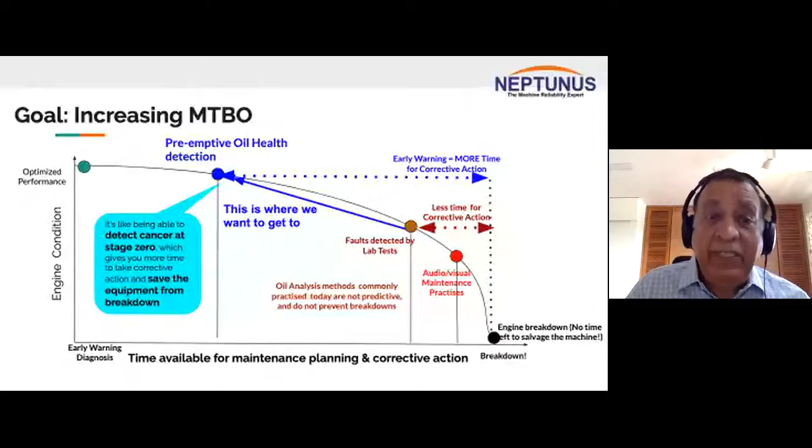Somebody talked of diesel doctor, somebody talked of lube oil analysis, etc., which took your detection point further up the curve, what you can see on the brown one. What I am propagating to you today is to move it so far ahead on the curve that you have enough time to take small corrective steps, small continual improvement steps to keep your engine performing in the best bandwidth. So I call that detecting cancer at stage 0, which gives you enough time to take corrective action and eventually eliminate breakdown completely.

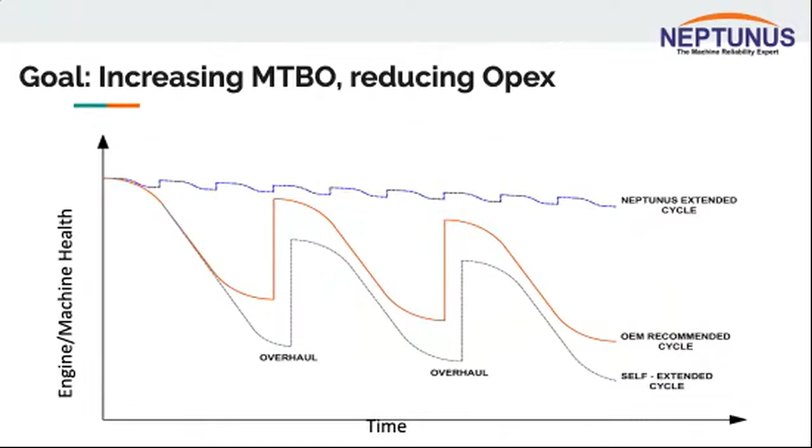So look at this slide. If you see the typical cycle of overhauls, you will see that the red line is what your OEM recommends. So after a certain number of hours, he could ask you to do a top overhaul, another few hours a major overhaul. Performance goes up to close to what it was at the test bench, comes down again, and so on and so forth. The dotted line below that is the line that an operator would typically do. So try and extend overhauls even at the cost of performance. And the blue line on top is what we propose is the right method of maintaining equipment today.

So small steps. So if one fuel injector is bad, replace it on time before it creates more problems in that cylinder. If there is one cylinder which has poor compression, please take care of that before that becomes a bigger issue. Eventually, I want to see this industry moving away from top overhauls and major overhauls to a system where we are going to say that we'll do whatever maintenance is required at frequent intervals to keep this within a band range.

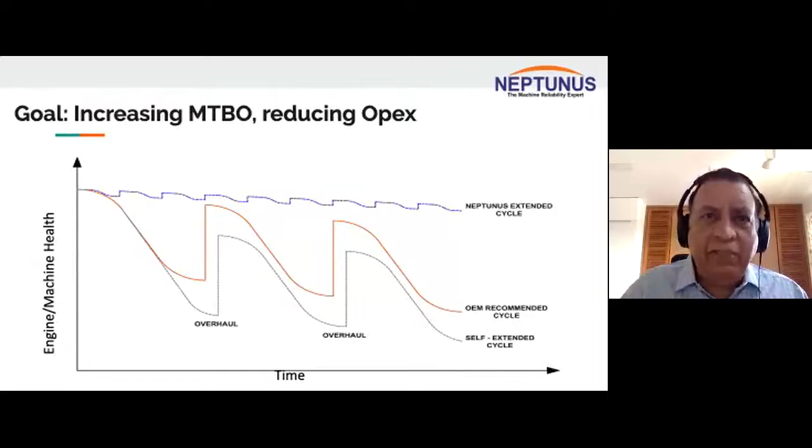There is a lot of research work going on here. The numbers that researchers have put out for such an approach to maintenance is staggering. They're talking of 70 and 80% reduction in OPEX costs by doing maintenance in this manner. So more of it later, but it's something that I'd want you to think about.

Let's come to spare part management. Spare part, most expensive element of OPEX other than fuel. So I'll place before you a few pointers. Please see what you'd like to take away from this one. It would vary from ship to ship or from company to company. But essentially, what we observe over the last 20 or 25 years, that common sense has been replaced by a repair by replacement philosophy.

So at one time, overhauls meant you had micrometers, you had verniers, you had internal micrometers. Gauging was such an important part. And after all, a top overhaul is nothing but a decarb, what we call. That means removing carbon from the cylinder. Do you really need to replace cylinder heads?

Do you need to replace all valves? Do you replace all guides? Do you need to even change turbochargers? Is it not possible to overhaul it? So I rarely see these days people gauging cylinder liners in four-stroke engines, especially the high-speed engines. I rarely see people gauging valves or valve guides, etc. A lot of money, I believe, is being wasted.

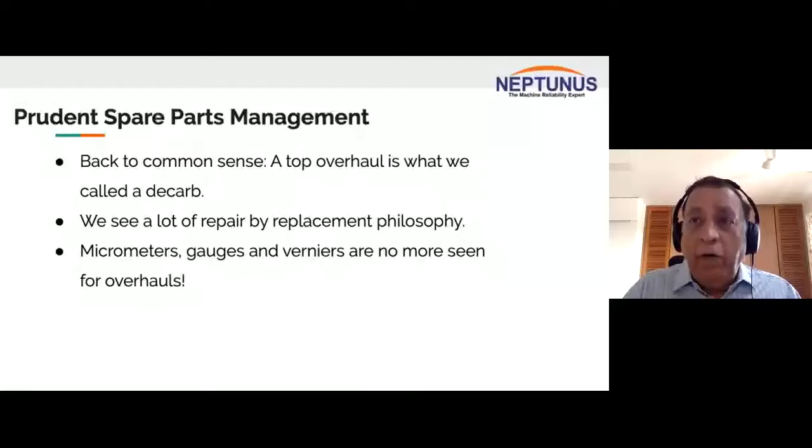So maybe you want to look at going back to what we did 20 years ago. That means that you calibrate, gauge, and only change those parts which have gone outside their wear limits. Incidentally, Caterpillar, Cummins, MTU, all the high-speed guys, even now if you ask for it, they have a manual that will give you change or wear limits, and they will tell you which are the use-again limits. So try and use that as one step.

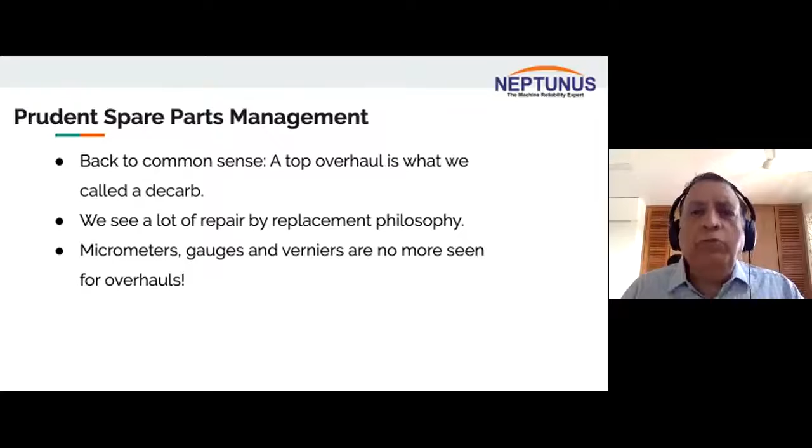Reman parts, I think all those who use CAT or Cummins or MTU engines, high-speed engines especially, reman parts or remanufactured parts is a great way to save money. Are they genuine? Yes, they are genuine. Are they rebuilt at the factory or by a distributor? The answer is at the factory. They carry the same warranty as brand new parts.

Big savings. For example, on your CAT 3500 series, an injector is roughly $1,800 to $2,000. A reman part will cost you roughly $1,200, a clean saving of $800 per injector. If you have 16 injectors, we're talking of saving $12,000. It's a lot of money. So cylinder heads, turbochargers, lifters, all sorts of components can or could be looked at under the reman program. Please see if you're using them. That's something that can be saved very easily.

Plan in advance. Get discounts from your vendors. Most manufacturers, if you place orders for your overhaul 6 months in advance, would give you decent discounts. Niigata, for example, would give you anywhere between 2 and 7, 8% for bulk orders that are placed 6 months in advance. I think all it needs is a little bit of planning, and 7 or 8% discounts are not small. So please speak to your vendor, see if there's a solution that you can find.

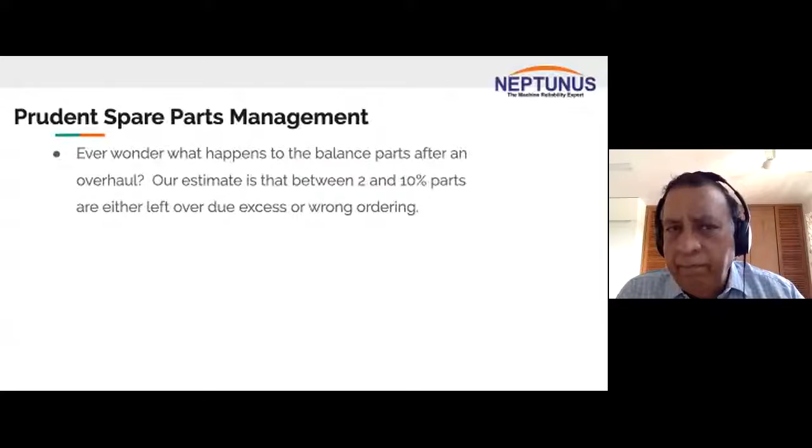Now, have you ever wondered what happens to the balance parts?

It's impossible that somebody has ordered just the exact amount of parts that go into an overhaul. The bigger the overhaul, the larger is what I call the spillover. It is our estimate that anywhere between 2 and 10% of the parts are either left over due to excess or wrong ordering. So if the parts are wrongly ordered, what happens?

They get lost into your system. They get stored on the vessel. Nobody ever hears of it. The office doesn't bother to find out what has happened to these excess parts. The next chief engineer who comes in is unsure. They may not be stored properly. They could be rusted. A lot of money, I believe, goes wasted here.

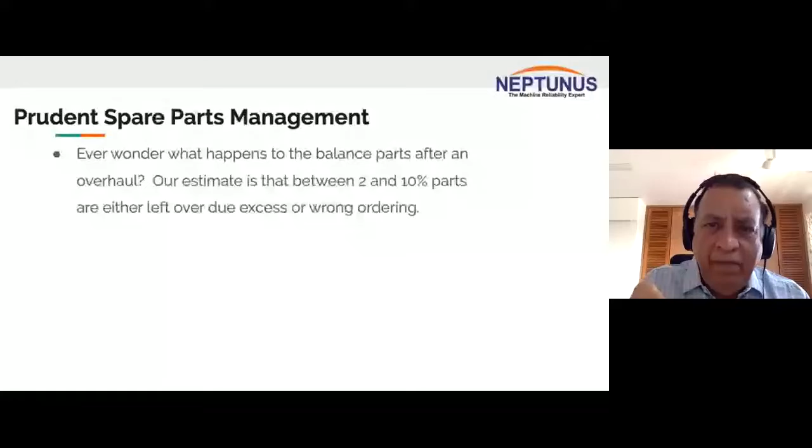Please focus your attention on whether you are taking care of those parts that are balanced after an overhaul.

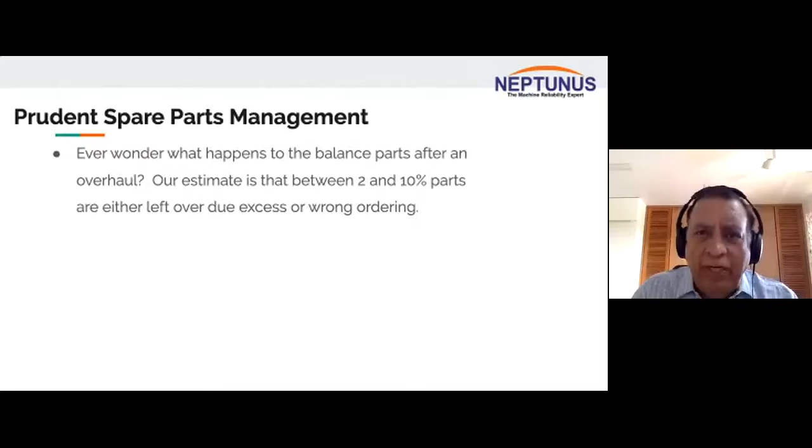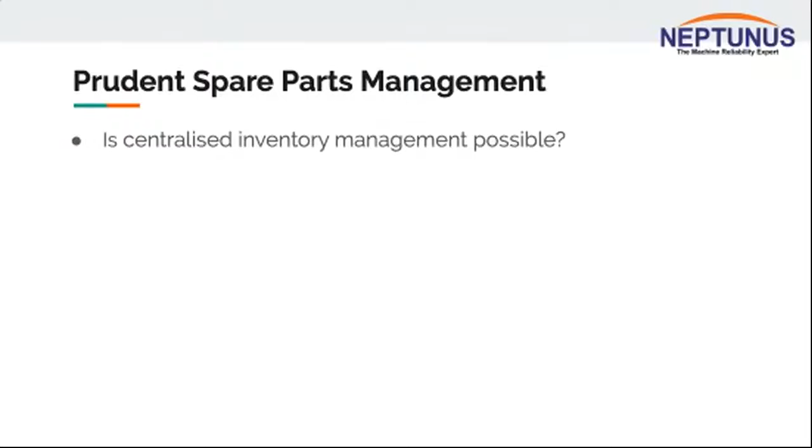And finally, is centralized inventory management possible? It is possible that you may not have a central store, but in today's technology-driven world, it is completely possible to account for the last O-ring or gasket within your fleet, especially if you know that you have a number of engines of the same type.

Eventually, these 2 and 10% that are actually located in various parts of your fleet should be tracked and should be available for an overhaul on another vessel. So, centralized inventory management makes it possible for money to be saved.

So I believe makers take back leftover spares at a lesser price. Sunil Kumar says. Sunil, I don't know whether they take it at a lesser price, but if you could negotiate with them earlier, or much before the contract starts, I believe there is a chance that you could get them back at the same price.

Ravindra Pandey asks, is Cat engine spare parts available reman? At the moment, we don't have a reman policy, but in any case, our being a medium speed engine, the spare part consumption is very small.

Bhagyashree Ogle says, could you please clarify what is MTBO? Sorry, Bhagyashree, MTBO is mean time between overhauls. So the period of time, either in running hours or in case of cars it could be mileage, is the time between two overhauls. And the whole idea is that you want to extend the time between overhauls.

Is there any drawback in using reman parts? Hitesh, none at all. There are no drawbacks. Reman parts carry the same warranty as original parts.

What is the life of reman parts compared to new parts? Mr. Bhutapuri asked me. It's the same. It's absolutely the same. There is no change because it's only the casing that is being reused. All other internal parts are brand new. So please do not believe that reman parts would have a lesser life. And this goes across brands. I'm not only talking of Cat or Cummins, but across brands.

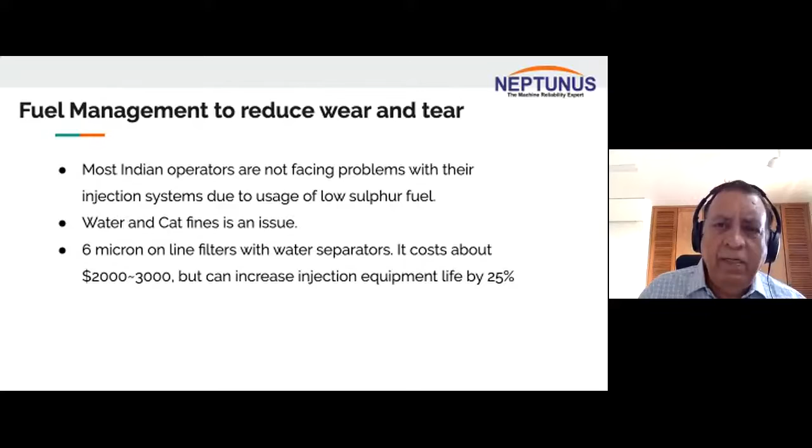Good fuel injection equipment means a good, clean combustion chamber, and that automatically prolongs the life of your equipment.

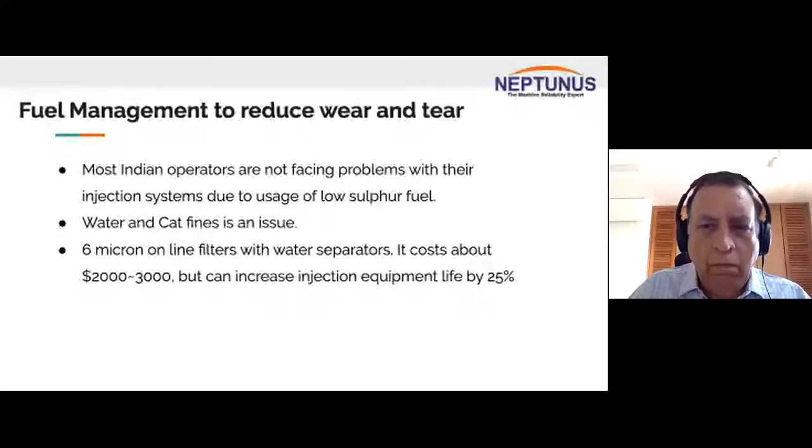Lube oil is something I'm passionate about. We had a seminar recently, and I keep spreading this message, not only in shipping but also in industry: the lowest hanging fruit to saving big money on your engine is to focus on your lubrication oil. Few people take it very seriously.

If you look at the diesel engine itself, oil degradation is caused by products of combustion such as acid, soot, unburnt carbon, moisture, etc., getting into the crankcase. You have a reduction in viscosity due to fuel dilution, coolant dilution, sometimes chemical contamination. Oil is under attack due to carbon deposits and the millions of wear and tear abrasion particles that keep coming into the sump. These cause oxidation, the nemesis of oil, leading to varnish, lacquer deposition, etc.

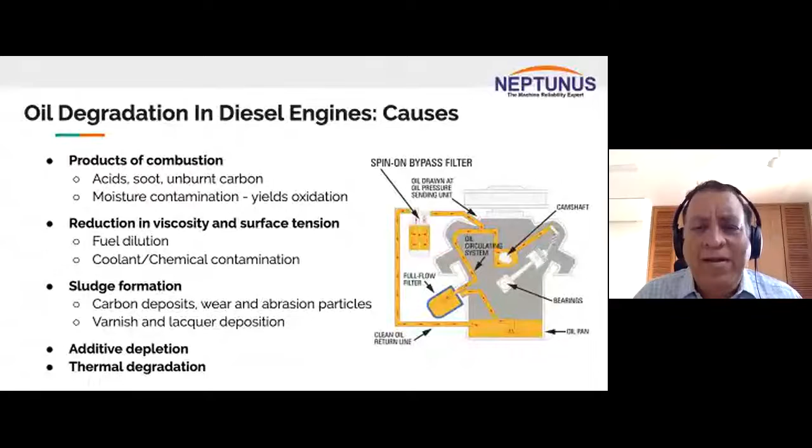Additives get depleted. The products of combustion are acidic, and they attack the TBN base additives. With additives being attacked, thermal degradation is constantly happening. So it is no wonder that oil in a diesel engine tends to degrade very rapidly.

For those of you who attended the Lube Oil seminar, these are the 3 slides I keep talking about. Please pay a little attention here.

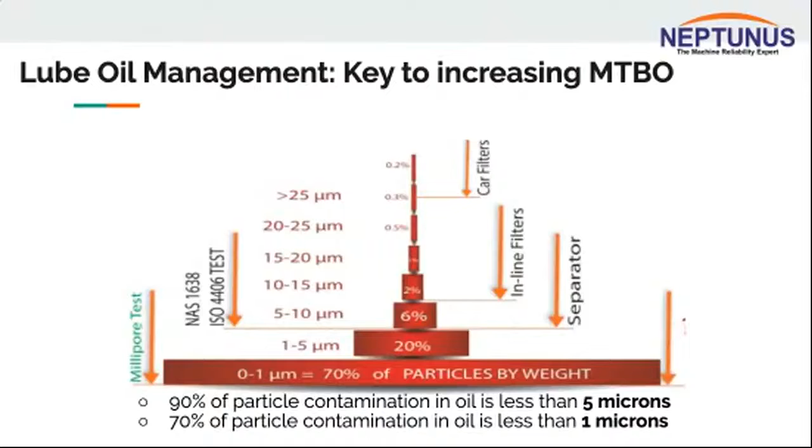90% of oil particles in your oil are below 5 micron. All your lube oil filters installed on your engine are 8 and 10 micron. That means 90% of the particulate matter never goes through a filter or is ever addressed by one. These 90% of particles are what really should worry you, because they cause oxidation in the oil.

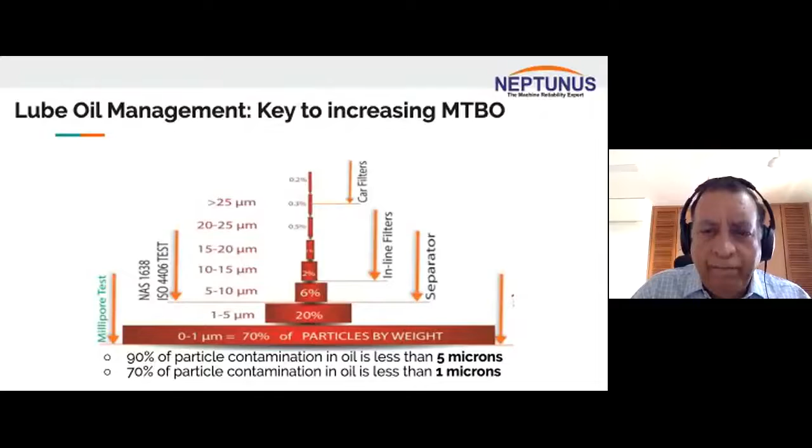Oxidation causes varnish and all the other issues you commonly face with lube oil. The other thing I want to highlight is how clean oil can dramatically improve the life of equipment.

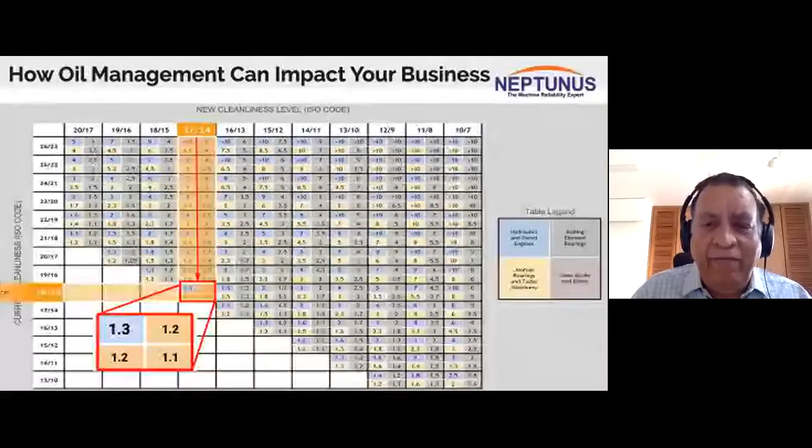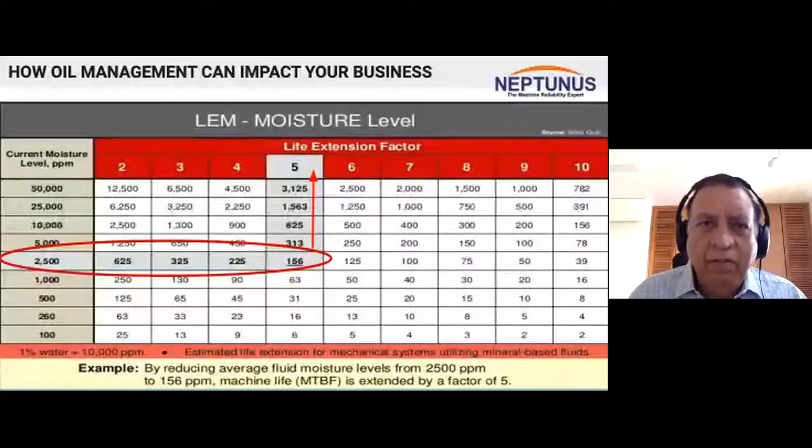The same thing applies to water—the number one enemy in your oil. Take 2,500 ppm of water in oil and bring it down to 150 as an example, and you get a life extension factor of 5 times. If you have 250 ppm and bring it down to 33 ppm, you get a 3 times life extension factor of your components. So please treat your oil with great seriousness.

So how do you prevent oil degradation in diesel engines? Two common things: prevent contamination and maintain a great combustion chamber. But what I propose is offline kidney loop filtration systems—an offline system doing only sump to sump, monitoring the condition of your oil.

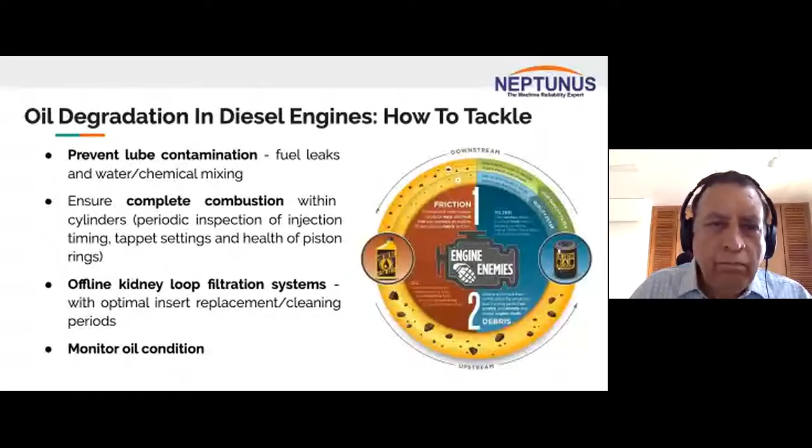Please consider using bypass kidney loop filtration systems. These need to be independent systems that run 24/7, using fractional horsepower pumps. The flow rates are typically 1 to 2 liters per minute. Make sure your filters have a high beta ratio of at least 400 plus, and ensure the oil gets at least 2 passes a day.

To get your oil down from 1815 to 1714 or even better is a question of a few weeks. The result you'll see is a cleaner combustion chamber and a cleaner crankcase. Six months down the line, the crankcase looks as if it's out of a brand new engine. Oil life can be extended by 300 to 500%.

We've got enough data on ground to help you take a decision. Payback for these filtration systems, in my mind, is less than 5 or 6 months. And that is the direct payback. When we are talking direct payback, we are talking of what you save in terms of oil and lube oil. We are not counting what you save in terms of increased life of components.

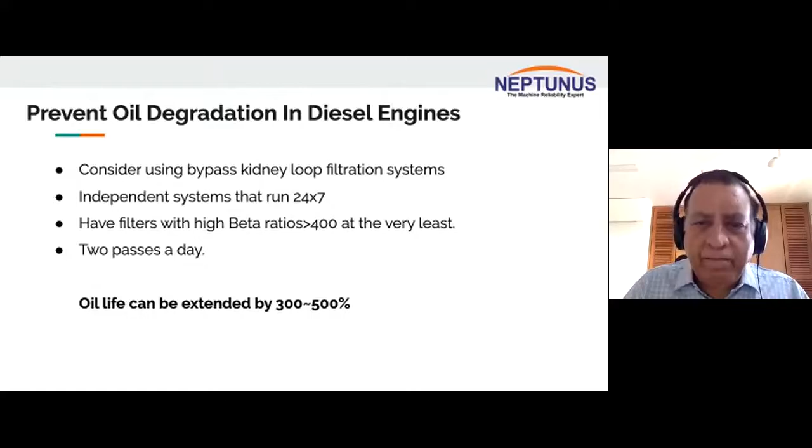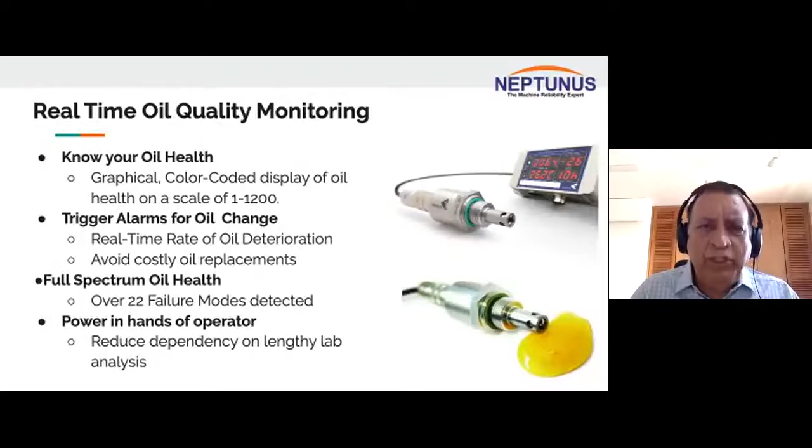If you want to monitor your oil, if you want to keep the quality high, you need to monitor it. If you do not believe in real-time monitoring, at least have regular lab tests done. Today, real-time monitoring is so cheap. For under $2,000 or thereabouts, you could get a single sensor that could detect over 22 failure modes, give you real-time rate of oil deterioration. It could trigger alarms in case of sudden contamination of oil. It could almost eliminate the need for you to send samples for lab analysis. And of course, it gives the power back in the hands of the operator.

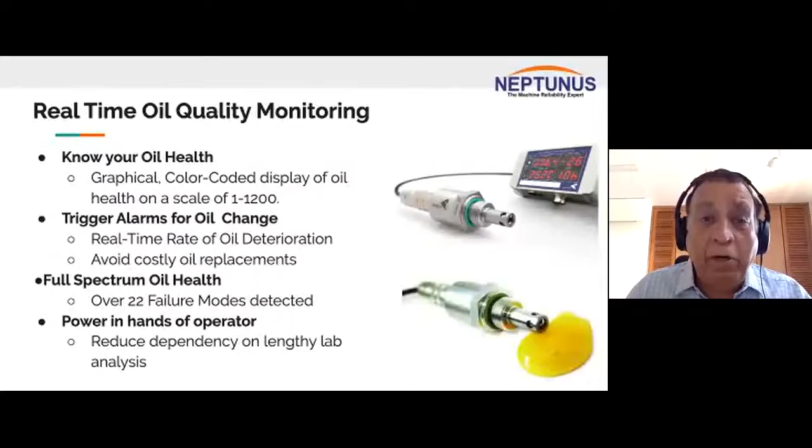So these are some of the things that an online sensor can do. Our field experience: online sensors can give you an accurate condition of your oil. In some cases, it could prevent you from changing oil at intervals specified by OEM by a factor of 50 to 100%. In case of contamination, it could prevent catastrophic failures by giving you early alarms. A combination of online sensors and offline filters, I can guarantee you your oil life will increase by a factor of anywhere between 2 to 5 times.

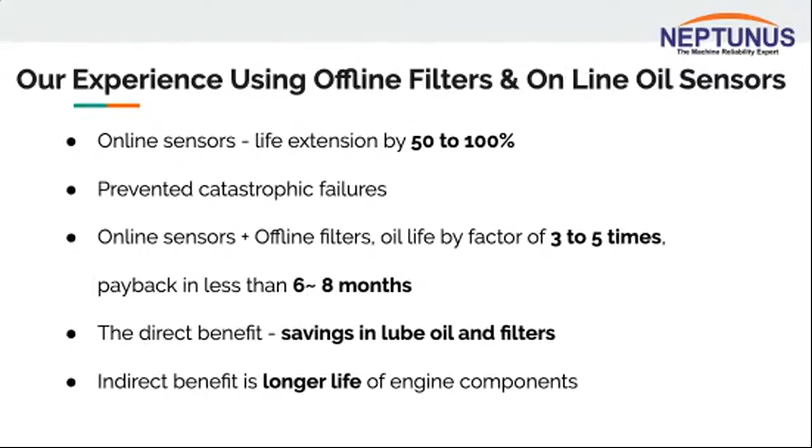Payback is less than 6 to 8 months. The direct savings is savings in lube oil and filters. The indirect saving is, of course, the bigger one, which is the longer life of engine components. So once again, lowest hanging fruit: oil. Please take oil management very seriously. Before I move on to torsional vibrations, are there any questions there?

Cause of asphaltenes and damage in lube oil, even though filters are in place. I don't understand this question. Cause of asphaltenes and damages in lube oil, even though filters are in place.

If you are looking at filters which are installed on the engine at 8 or 10 microns, they're really not doing the work that they're supposed to do. Look at offline filtration systems, which typically you could start off with maybe 5 microns, later on move to 3 microns. They will not only remove wear particles, effectively stop oxidation, but to a large extent, they could remove sludge, carbon deposits, etc. Please keep in mind that the color of your oil can change because the soot actually discolors the oil. So the color of your oil is really not any measure of how clean or dirty it is.

I've got a question: what is the high beta ratio for lube oil filters? A high beta ratio for lube oil filters, I would think a minimum of 400. Some of the good filters could go up to 900,000, but 400 I think should be minimum.

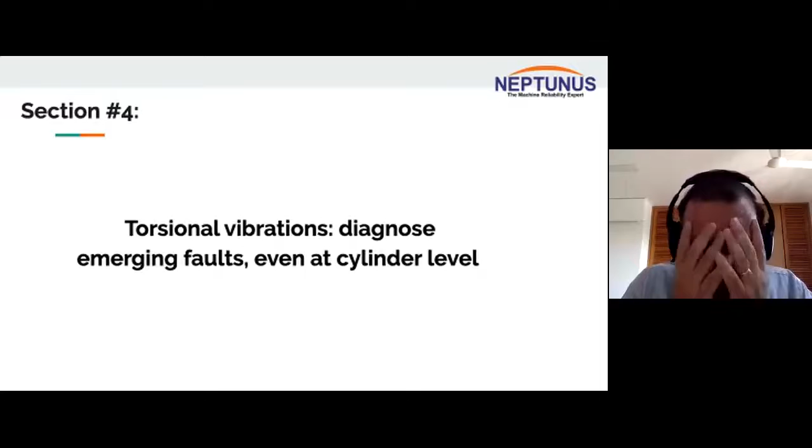Let me take a CAT engine which has a 3500 series engine, sump maybe 800 liters, oil change every 1,000 hours. So I'm saying that the effective cost of an oil change could be $2 a liter, maybe more, but conservatively let's say $2, and this includes transportation etc. If you could double your oil life from 1,000 to 2,000 hours, you have saved $1,600.

An offline filtration system, in my mind, roughly is give or take $2,500. So we are talking of a very simple system that can pay back in less than 2 oil changes.

Online sensor results are acceptable by OEM. They will probably ask for records, but I don't see how the OEM is concerned with your oil records. OEM never asks you for your oil records outside warranty. So while you are in warranty, please observe all the rules that the OEM wants. Beyond warranty, these are systems that you are installing to enhance the quality and life of your equipment.

Thank you, sir. Could you please share if Neptunus does install these real-time lube oil monitoring sensors? We do, but we won't answer that question here.

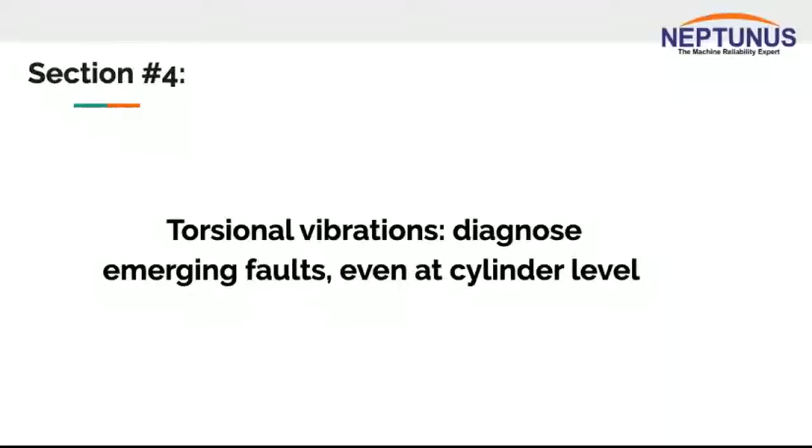Okay, I think we're a little short of time. Let me go on to torsional vibrations, which I think is the latest technology that is emerging. So I started talking of torsional vibrations and the beauty and simplicity of this system maybe 2.5 years ago. I made some presentations to a lot of classification societies. The concept then was new to understand.

Even today, people cannot understand how a single RPM measuring sensor, a magnetic pickup unit, can give you such detailed diagnosis. But you'd be happy to note that recently there was a press release from DNV GL saying that they are now using torsional vibrations to monitor the condition of bearings and shaft propulsion systems. So it won't be long before other people start picking onto this technology.

Essentially, torsional vibration is understanding the movement of the shaft and picking up the variations in the shaft rotation and connecting it to faults in the cylinder. We are not talking of the RPM varying - the RPM in a diesel engine will vary. If it's 1500 RPM, it could be anywhere between 1470, 1505, etc. I'm saying that within a single rotation of the shaft, the changes in the shaft and the change in position of the center of the shaft with respect to the axis is what torsional vibrations is.

So, what are the current methods being employed to predict faults? Currently, there is no reliable system in the market to predict faults. And predicting is different from pinpointing or troubleshooting. So it is one thing to have a broken cylinder or a worn piston ring, and then to diagnose a worn piston ring - that is troubleshooting. It is not predicting a fault.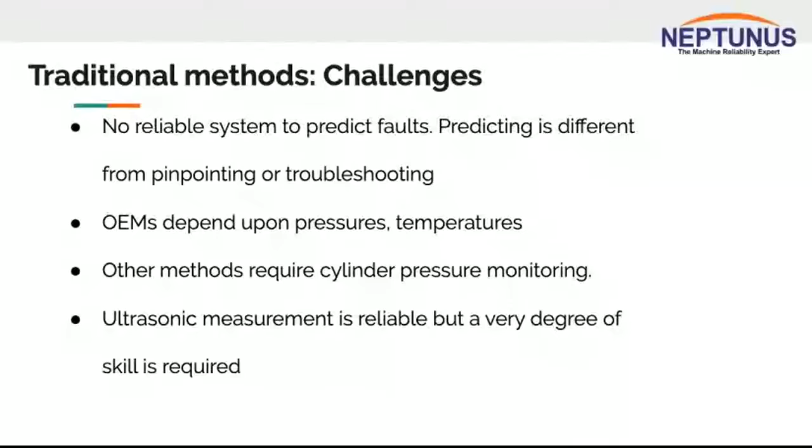So, not great. Ultrasonic measurement of components is very accurate, but it requires a very high degree of skill on part of the operator to take his ultrasonic measuring equipment and actually point it into the combustion chamber faults. So, not great in use, not great in online monitoring. So, what is the option?

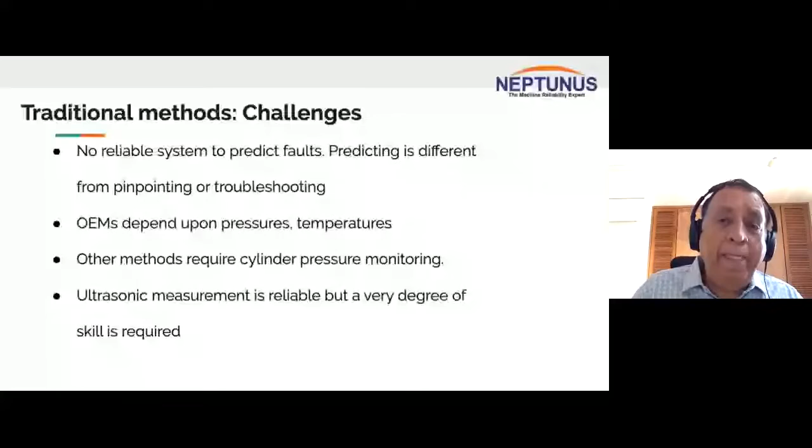Torsional vibrations is nothing but the measure and analysis of the speed and the analysis of its variations through statistical and mathematical computation to derive component-specific and overall health indicators.

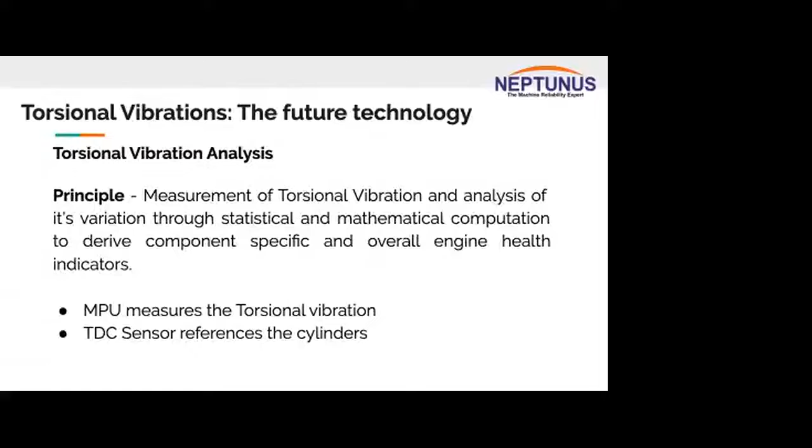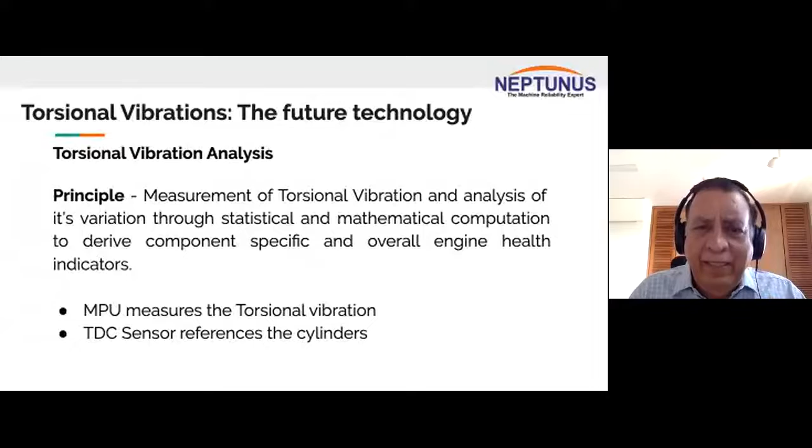What do I need? I need two sensors. One is an MPU that measures the speed on the flywheel. And I need another sensor anywhere on the engine which could reference my top dead center sensor on one cylinder. That is because I need to pinpoint exactly where my problem is. So once again, retrofitting is simple and easy: one speed sensor, one TDC sensor, and this is what the theory is.

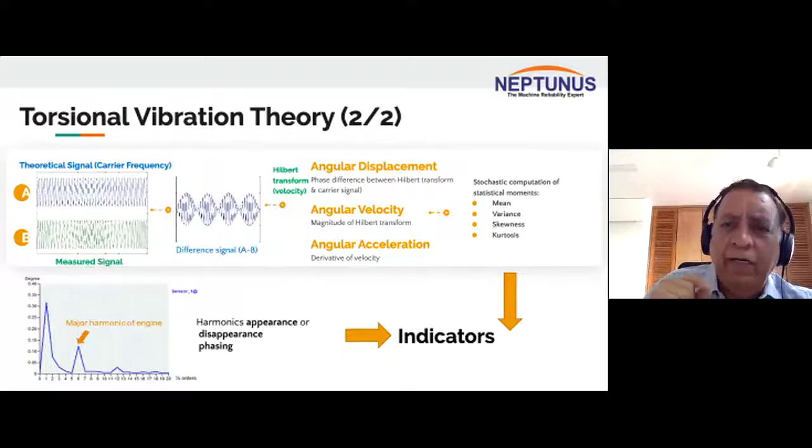If I take any two-stroke or four-stroke engine, if I know the number of cylinders, if I know the RPM, and if I know its firing order, I can create a theoretical sine wave which would be practically the same for any engine. We know that the RPM is almost a sine wave. So whenever a cylinder fires, there's an instantaneous increase in RPM. When it goes into compression mode, the speed drops, and so on.

So if you can see your graph here, signal A on the top left is the theoretical signal which is calculated on the basis of basic input data. Once again, ladies and gentlemen, if this screen does not fit in here, please use the plus and minus to fit it into your screen. My speed measuring signal B gives me the measured signal.

So the difference between A and B is a signal which I'm going to subject to a Hilbert transform. Hilbert transform is a mathematical formula that is applied to this signal difference. And just like in accelerometers, I now have angular displacement, angular velocity, and angular acceleration. These are derived from velocity.

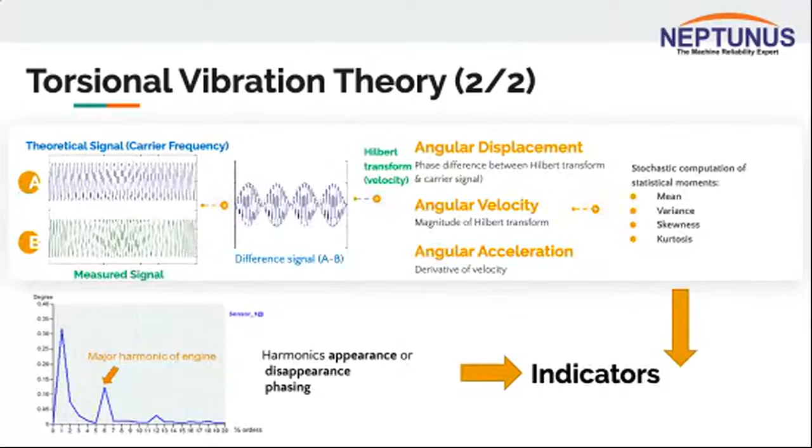Further, our input now gets into computation of statistical moments. You get mean, skewness, variance, and kurtosis. These signals are also subject to harmonic studies. For example, here we've shown you that the first half of the sixth harmonic has a spike, which is related to the fuel injection equipment in your system. So there are indicators, half harmonics, that could connect to certain indicators on your system, and just one RPM sensor is able to give you this data.

So it gives you the overall mechanical health of the engine. If you were a fleet manager, the overall mechanical health and operating condition are the only two parameters that you need to know on your mobile. If these two are within normal limits, you needn't look at the rest of them.

But going further, it can tell you what the mechanical stresses are. It could tell you the condition of the mounts. And this has nothing to do with the condition of your moving components within the engine. It could be external factors that are affecting your foundation bolts. This could be thrust from your propeller, thrust from your alternator. It could be a loose or bad foundation, etc.

It also gives you a torsional angle or twist, which is the difference in power between the left bank and the right bank in V engines. Further, these two sensors can also give you the power output, very useful when you're talking of propulsion engines. Once again, just two sensors, easy to retrofit.

And what are the cylinder-specific indicators? Currently, the system can give you about 4 different indicators. Cylinder-wise, it could give you the compression on a scale of 0 to 100. It could tell you the injection timing, again on a scale of 0 to 100. Injection condition, again on a scale of 0 to 100. And bearing and friction, again on a scale of 0 to 100. So this is the detailed information that is possible to get here.

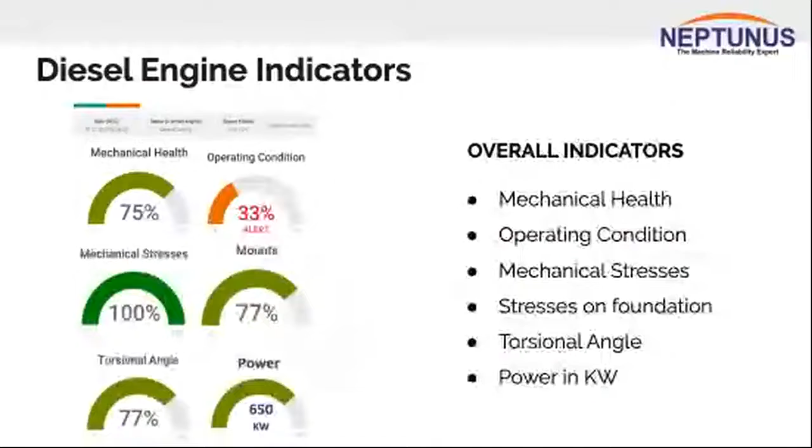And so I said in the beginning that we would like to move away from top overhaul, major overhaul. I think using these indicators, and the ones that I showed earlier on mechanical health, operating condition is nothing but the fuel efficiency of the equipment. It should be possible to start working on specific cylinders rather than opening the engine all at once.

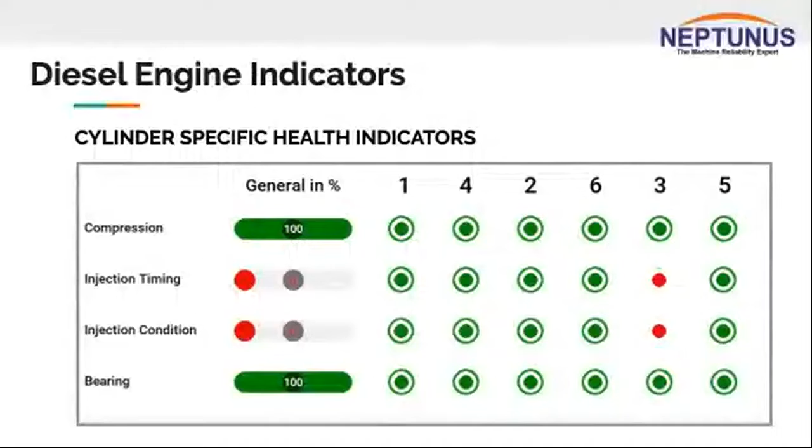Once again, I'm coming back to the slide where I started off with on continual improvements for extended life. If we could take small corrective steps based on cylinder indicators, we could start taking continual small corrective actions. You're not letting engine performance deteriorate to a level where large amounts of money are required to bring it back to its original condition, and you're keeping the engine within tight limits of performance.

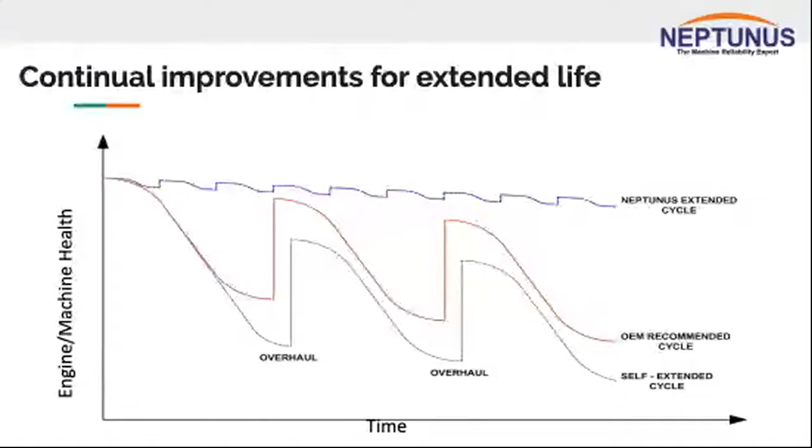Let me sum up why torsional vibrations is so exciting. There's a considerable saving in fuel consumption and overall efficiency. There's cylinder-specific indications to pinpoint the exact cause of trouble. You can extend overhaul intervals safely. If you can take your 15,000 hour overhaul to say 20,000 hours safely, on the basis of data, not on the basis of your chief engineer's gut feeling, purely on the basis of data, that's a clean 33% that you've saved there. If you start adding savings from lube oil, savings from fuel, savings from spare part management, I think there's a lot of waste in the system which you could focus on.

Our eventual aim is to eliminate all breakdowns. We want to reduce operational and efficiency downtime costs, and of course, we want an overall health indicator. Any questions so far?

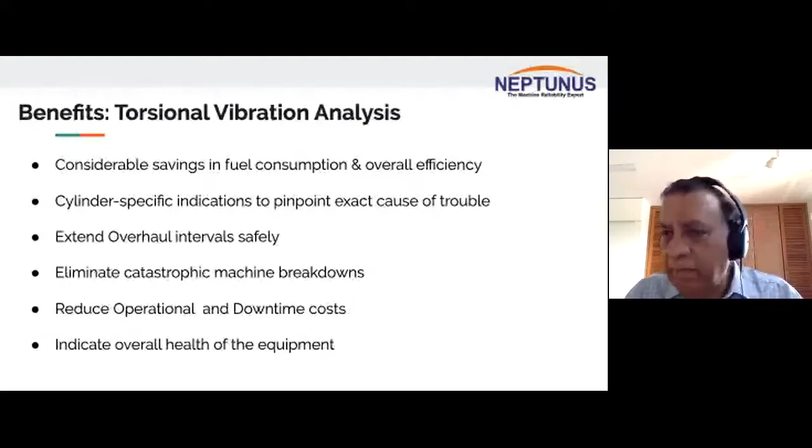What does MPU mean? MPU means a magnetic pickup unit, an RPM sensor that you have installed on your engine.

At what time intervals do these torsional vibration measurements need to be taken? Mr. Krishnan, it depends on how your engine is running, but a lot of people now want it permanently installed so that this is an online monitoring system. You can pull out the data maybe once every 2 hours, 3 hours or so. But these are all online systems that are meant to be installed permanently.

The responsibility to use CBM in place of PMS is difficult to take in by big bosses of the company. Sanjeev, I don't know, I have no answer to that one, that it's difficult to take in by big bosses. But I do know several companies are moving towards CBM in place of PMS. It will require you to work with class to prove to them that you are doing it in a very scientific and methodical manner. Maybe you need to demonstrate that by keeping records and documents till they believe that your condition-based maintenance system is reliable. But class has already started approving certain processes and methods. So really, it's a question of when they do it.

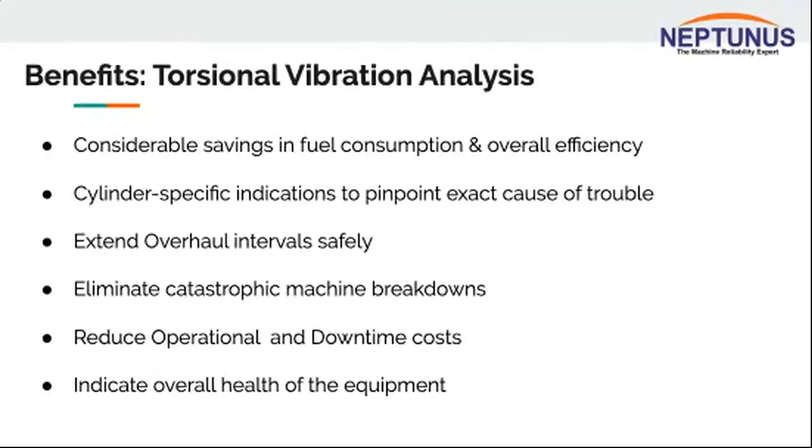So, remote monitoring. Is there a case now for remote monitoring of your engines, either on rigs or on board vessels?

At one time, remote monitoring was expensive. The whole process meant a lot of investment. But let me make an argument why remote monitoring is and should be considered.

One, COVID is making it more difficult to get people on board your ships or rigs. Recently, we had to send 3 of our techies on board a rig. That meant 7-day quarantine in a hotel, testing before going on the rig. After you come back from the rig, another 7 days of quarantine, testing again. Whoever bears the cost, it is a cost. So 14 days of idle time, testing, and that means that in an emergency, you can't get people ashore on board. So this is something that is going to stay with you.

We better plan for it. Shortage of crew is already being felt by a lot of ship owners. Shortage of skilled crew is something that we've been complaining about a lot.

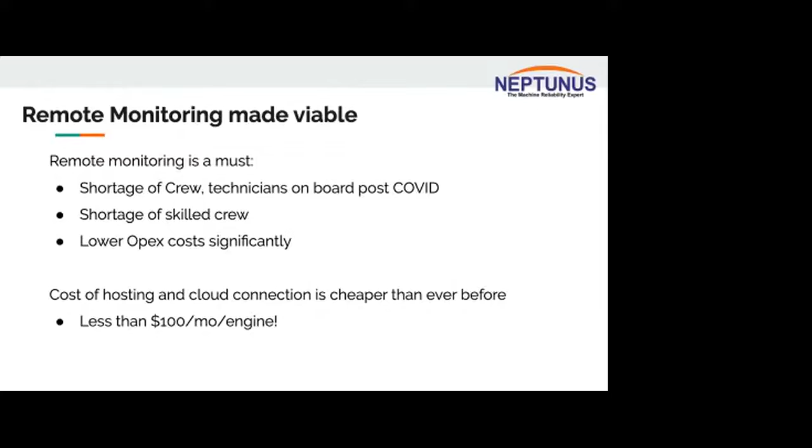And today, technology has become so cheap that anybody should be able to get whatever data you wish and need on your mobile devices as well. So you can get your entire engine details of whichever vessel you want on your phone.

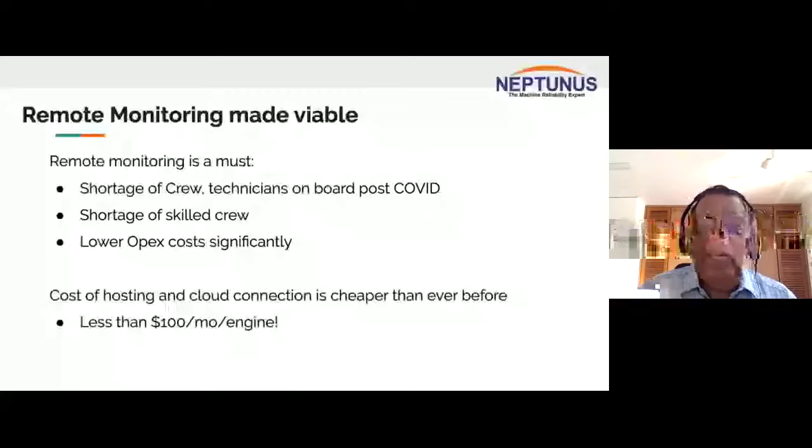Cost of hosting and cloud connection is cheaper than ever before. Amazon, Google have made it so cheap now. You can get this data streaming from your vessel, as long as you have internet connection, for less than $100 per month per engine. So I don't think $100 to monitor an engine remotely is a big price to pay, but remote monitoring has to be the future. It is very viable, and it is another way that you can save a lot of money.

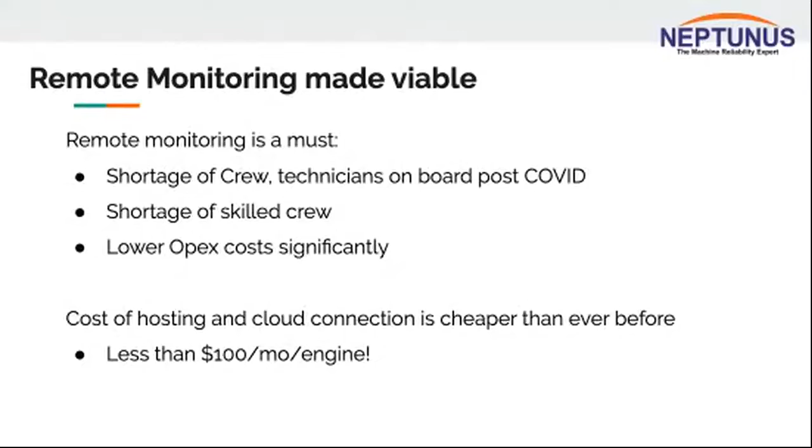Today, servers which are hosted on the AWS platform are very cheap. We use analytics software like PostgreSQL and Cassandra. Real-time messages and email alerts can be generated very easily. We are doing that a lot in industry today. It reduces manpower at site as well.

I'd just like to share with you, I think last month CIO Review India, a magazine that looks at IoT, identified us as one of the 10 companies providing cutting-edge solutions in the IoT space, especially for enhancing predictive maintenance with innovative asset reliability management. So just a note to share with you here.